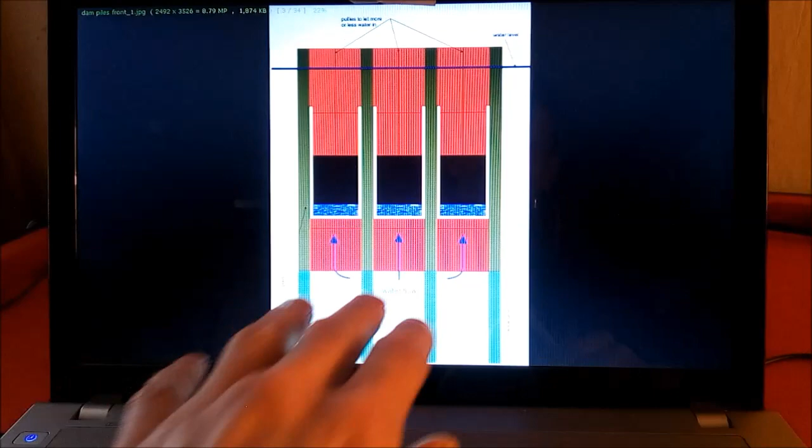Not the greatest quality in the world, but it gives you an idea. On the other drawing I did, these were higher, and this is to let the water in. As you let the water in, that's what powers your turbines.

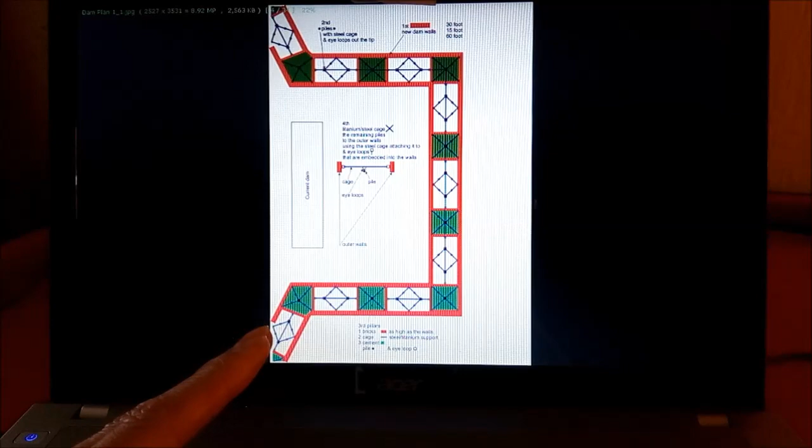With building these structures, you'd have the main river that would usually flow this way underneath the screen. What you'd want to do is manipulate it so it blocks off here, and the water comes running in this way, while you still keep the original river here. Once it's run through here and gone through your dam, you connect it back to the river, so that if there was any integrity issue or something went wrong, all you'd need to do is lower the arm here and allow the river to start flowing in its usual direction. This would act as a holder, and I'm pretty sure the water would take a bit longer to flow back through this way, but it beats the water flowing over the dam.

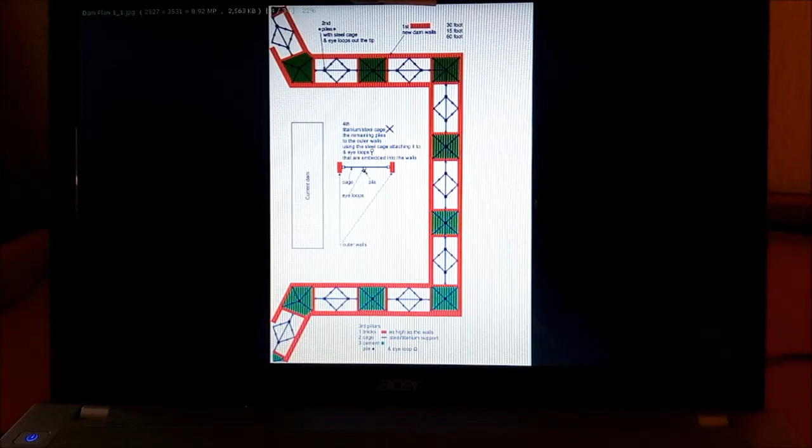So yeah, I chose steel or titanium, and these would be fixed to piles. If you don't know what piles are, Google them - they're quite interesting, how you get it done with a rig and everything else. So that's basically where I went with that.

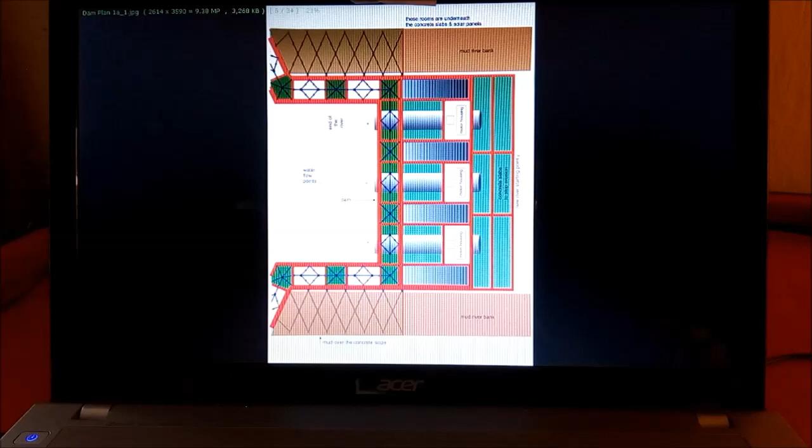This one would just show you the inside of the dam's structure. So we have a bank here. If the original river would be running here, this would be a side of it, and the arm would be over here. That would either stop the water from going in the normal way from the river, so it goes through your dam and through your turbines, or you'd lower this with an electronic arm maybe, and the river would flow on its normal course if anything untoward happened within these motor housings or anything else - if you needed to put some more piles in, or the integrity of the structure didn't work too well. Who knows?

It beats the water flowing over the dam and then causing further problems. This way it can store the water but not have any more pressure put on it, if the original river was able to still flow.

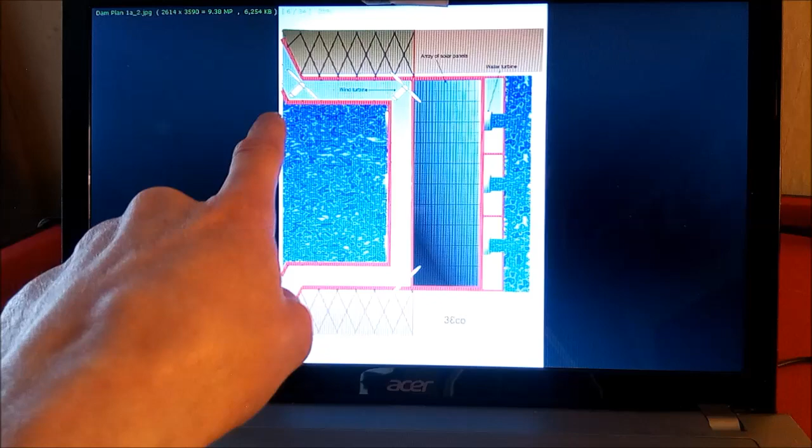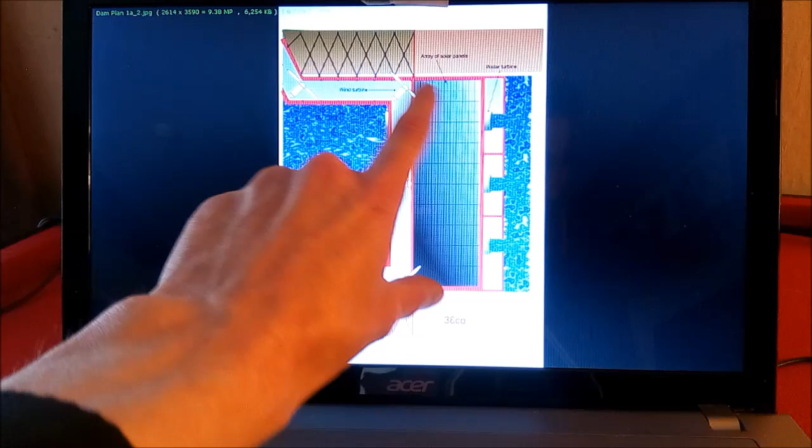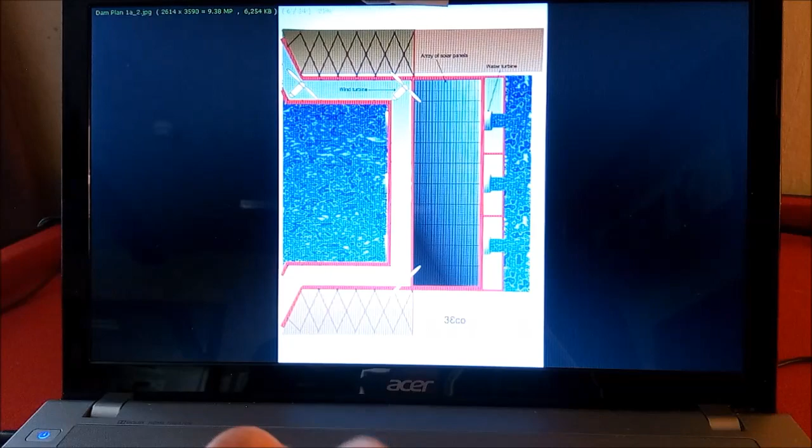So this is the final product of what you would see. Again, wind turbines - I don't know if you can make these out too well, they're on my website so you can check them out there. This is a nice grid of solar panels, obviously slanted, so from the side view these solar panels sit down the slope. Usually I see a lot of these slopes wasted, so I'd also be tempted to put some solar panels here as well and use the space with that slope and this slope down here. I called this one 3Eco, as it's three types of energy: solar panels, wind turbines, and the turbines from the water, generating free eco - three lots of energy all in one hit, to be honest.

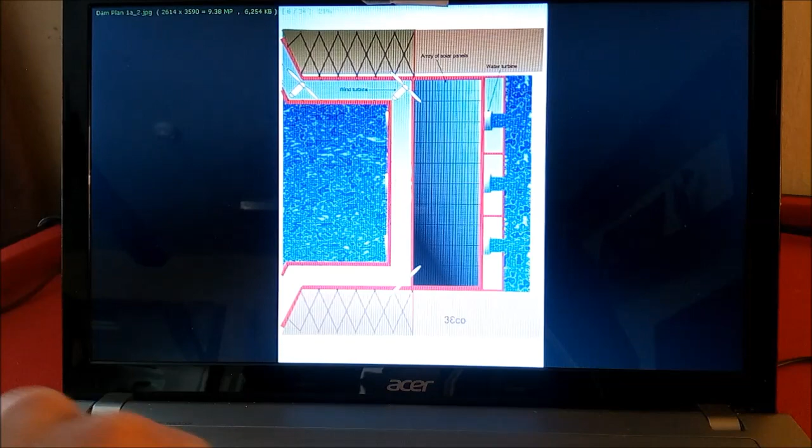So I don't think there are any more - that's something different, that's basically where I got with those. But there is another drawing I've got, still in the pipeline to be fair. I've not completed it yet, but when I do, I'm going to share that one, and it explains how we can do this in steps.

We can make basically one of these, and then further down the river we can make another one, and then further down the river we could make another one. Each one would generate copious amounts of energy, and if you can convert your whole river into a series of dam after dam after dam, the amount of power you could generate is quite a lot.

There's another thing environmental groups would probably come at you and say: what about fish? Because eels most certainly travel upriver, wouldn't this stop them traveling upriver? Now, the dam itself would, but there's this other invention I'm adding to the other one that would allow the fish to sidestep these.

So you know how there are areas where deer, badgers and stuff can go underneath tunnels under main roads and dual carriageways, so they don't go over the top, they go underneath? It's the same principle I've used for this, which would allow fish that swim upriver during their breeding times to use this to sidestep the dam. They wouldn't need to interact with the dam, and would be able to find their way through without affecting it or causing water to flow through that channel. It's just too thin for large volumes of water to get in there.

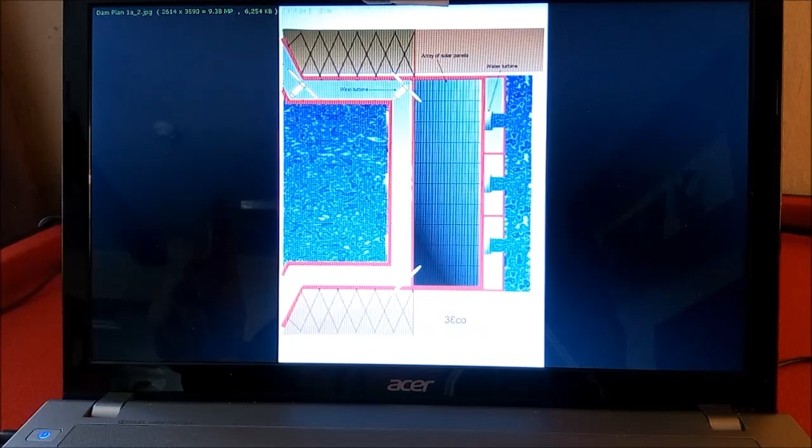I do apologize. So yeah, these dams I think would be pretty good, but generating quite a bit of energy, to be fair. Three types - nice wind turbines sat on top. Obviously when you get fast flowing water, especially through turbines, and it starts rushing out this end, I think there will be an airstream that flies up this way.

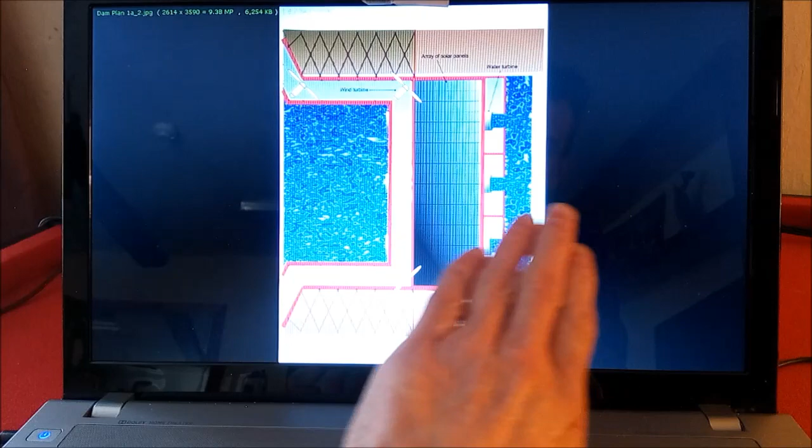Waterfalls, anywhere you've ever been where there's fast flowing water - there's this weir in Thetford, there used to be one here in Wymondham but not so much anymore, I think they've taken it out. But wherever you have fast movement of water, I don't know if you've ever picked up on that.

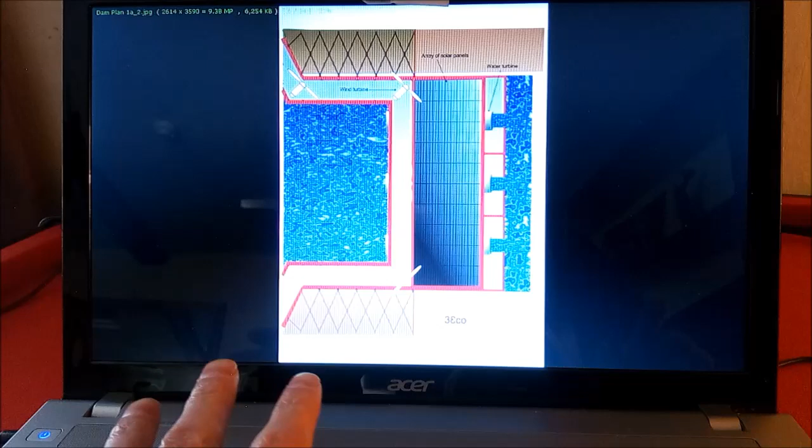You get this breeze, quite a strong breeze coming off any water that moves fast. If you have your power shower on and you stand slightly away from it with the cold water running rather than hot, you can feel a breeze - it almost generates quite a strong breeze. Considering it's just a power shower, the same thing will happen with these, and that's why the wind turbines are sat up here.

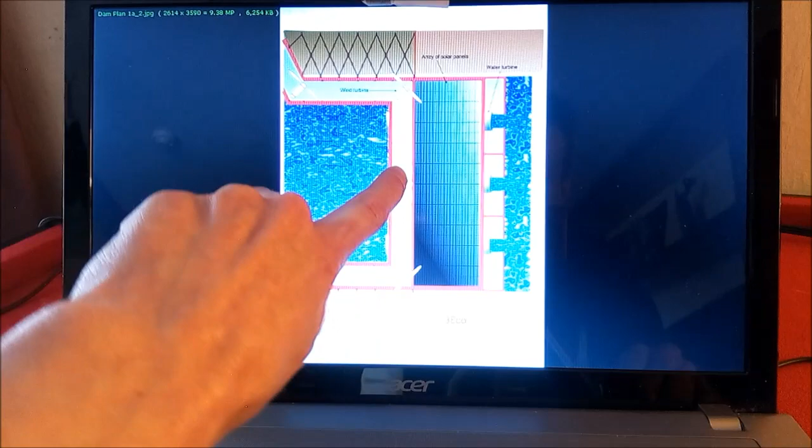There's one in the middle here, although it's not very clear on here, to be fair, not really picking it up. So there's one here, one here, one here, one down here, one here, and there was also one over here and one over here.

And that wind generated off the water moving fast will power the generators on the wind turbines to give even more power, I believe. So even if it's a windy day, the wind will slide up here because it's quite aerodynamic, because like I said, it's on a curve.

I wanted to get this one out of the way because every time you mention dams to people, they aren't very confident with them. They'll always bring up the China dam. There was a dam in France, or maybe Italy, that also had technical issues and integrity problems when they started building it.

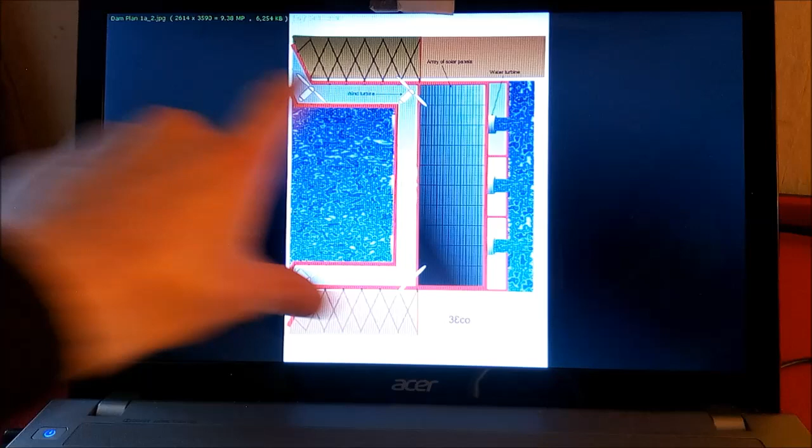Again, we could build these right before the ocean, at the end of the river, and build a lot of them at the end of all rivers, taking it in steps. If there's a lot of water and increased rain, we just keep it beside the old river and manipulate the flow of the water.

Usually the water would flow this way, but if we put an arm here, a mechanical arm that opens and closes, it can fill this bit. If there's a large amount of rain or the integrity is becoming bad, we take the pressure off by opening this gate, and the water runs its normal course, slowly trickling back into the river.

We could control the flow here by shutting it off using these. Drop these down and open the gate here. These would then stop putting out their water, and the river would continue on its normal path like it always used to.

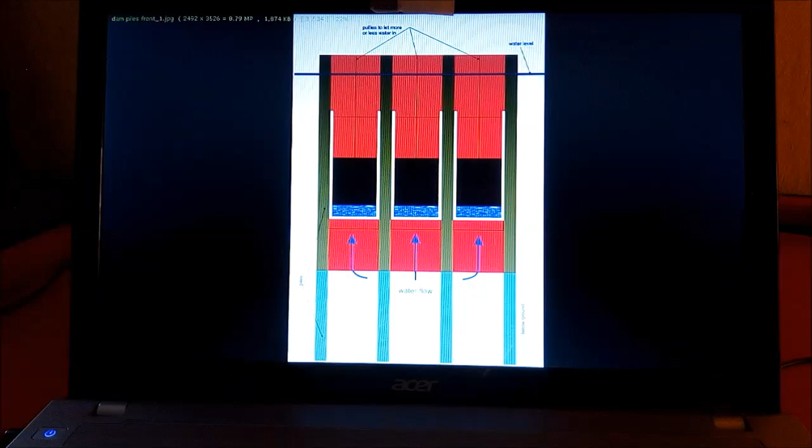The water that's been held back would stay here, and slowly, if we opened these just a small amount, we'd turn on the water, which would come out here and feed onto the river, so we don't flood any neighbouring houses, villages, or cities in its path if it was to burst.

Slowly this level would start to dry up, the river would go on its normal course, and then technical work could be done to fix the problem.

I think most dams are built on the actual river, so when there's a problem, is it a wonder it becomes a big problem? Well yes, because you've built it on the main river — where else is that water going to go? It's got nowhere to go apart from this way, whereas this one has two ways to go.

It can go on its normal course, which we stopped and manipulated. So we have this much of the river that's the old flow, and now we've created this diversion — diverting the water through our turbines and back into the main river. If there were any problems, we could just lower these and the river would continue to flow like before we built the dam.

Rather than having the dam where there was only this one way out and way in — if there was ever a problem, the only thing you could do is wait for it to break, and then a large volume of water would flood everything. This way eliminates that problem.

There's always a way around this type of situation to stop big problems from happening. You have to think about the problems that could happen and implement solutions into your ideas. That way, what you get isn't exactly fail-safe, but it's definitely a lot more contingent.

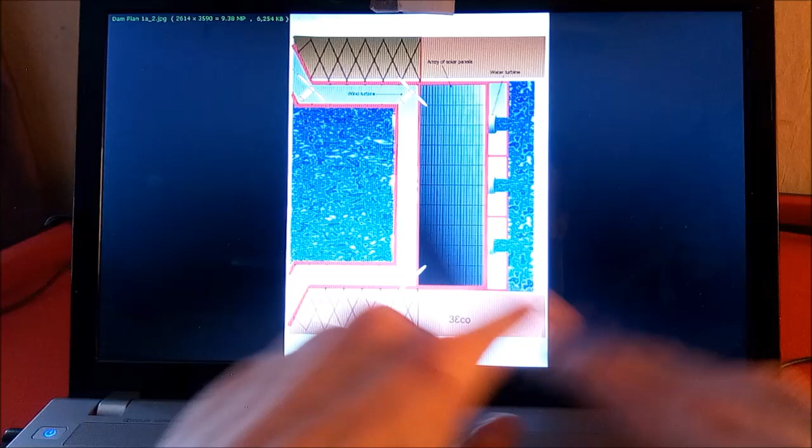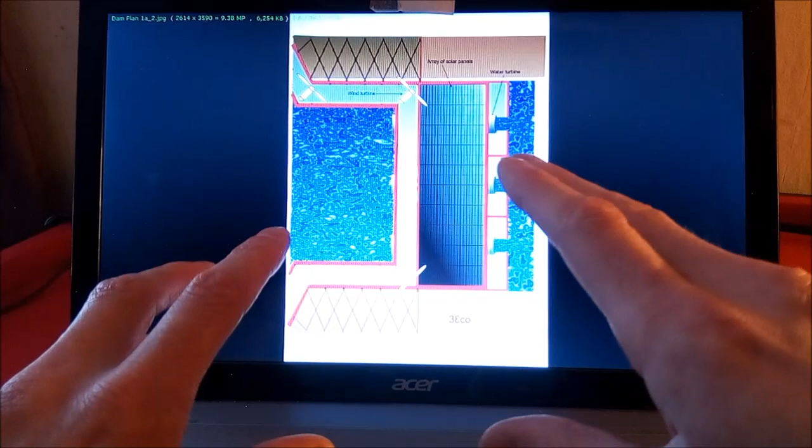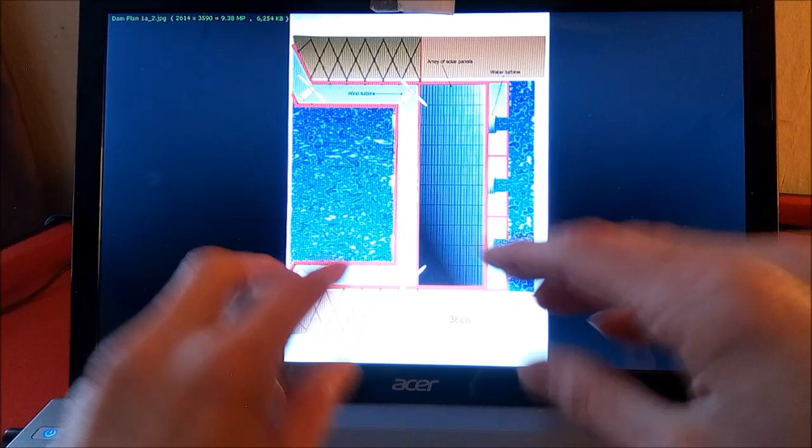Step two is to slowly start draining this into the river so the river will be a slight bit more full than usual, but not all of that water going all at once. We release some of this water back into the river itself. Step three is to monitor it until this dries up. Then step four would be to fix whatever your problems were inside the structure.

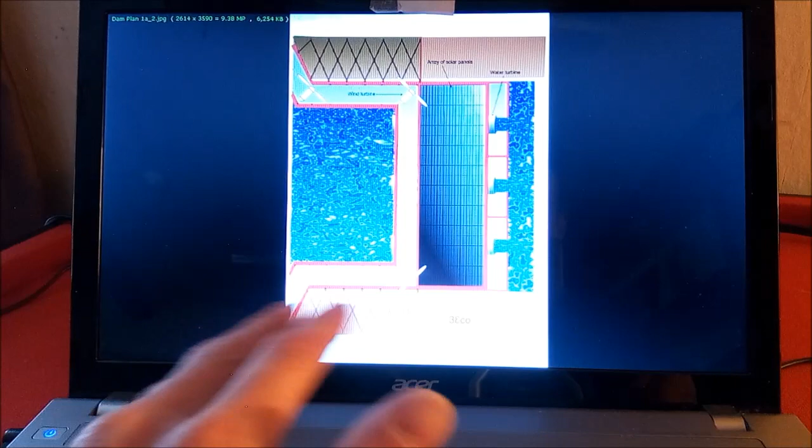Step five is assess and test. Assess the situation - is it going to happen again? It might. How successful was it at letting the water out? Always check your fail safes to see how successful they were. Yes, it worked really well.

Then you have this understanding - not just that you know how to build a dam, but now you understand what to do if this was to ever go wrong. How could we get rid of this water safely without affecting the integrity of the overall dam, or the river's natural flow? I think this is the best way forward, using a lot of forward thinking.

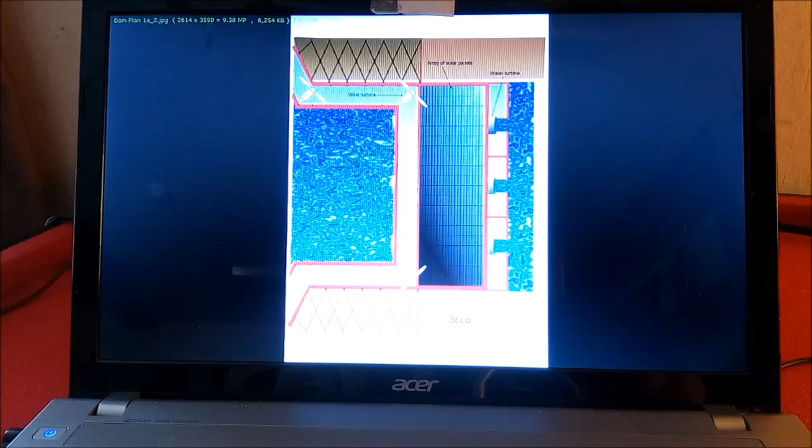We don't ever want there to be a problem with this dam. However, if there was a problem - let's say an earthquake caused a split or a tear through here - we're going to have to deal with that. We can take the pressure off. It's not going to go anywhere. Then we're able to deal with the problems as they come.

Anyway, so as I say, this is just a quick video on that.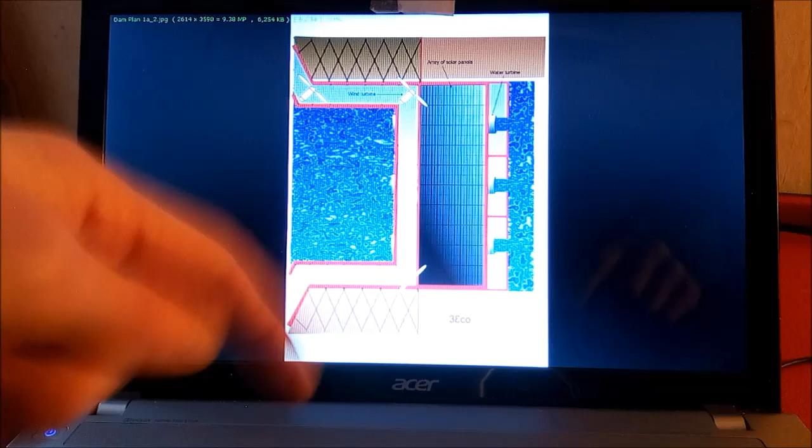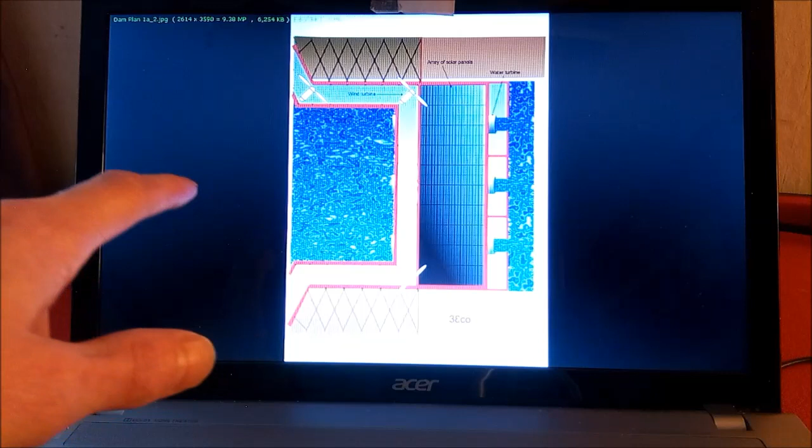Stage one. I have another couple more drawings to go on the next version of this, where they run in steps - basically one dam after another dam after another dam. That one is also on my website, but it was more for a pit. Basically, if we've got pits, we can just recirculate the water.

Keeping water circulating basically stops it from becoming stagnant - keeping water moving quite fast mixes a lot of air into it and stops algae bloom. So it stops things becoming stagnant and that horrible stench you get with stagnated water. Anyway, that will come in another video, but this one's just a quick one.

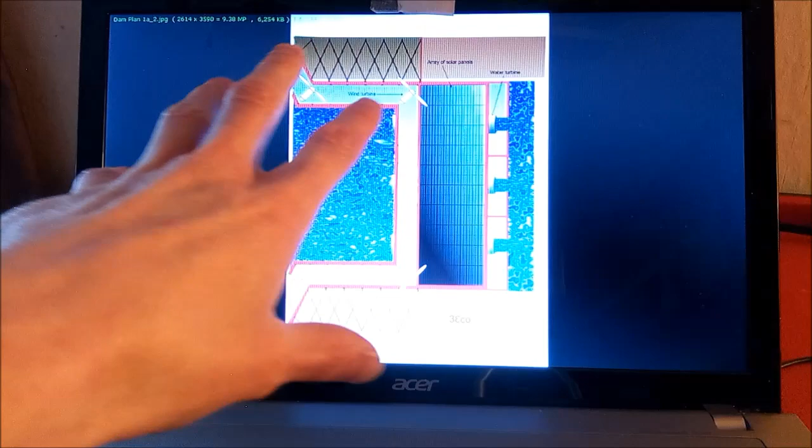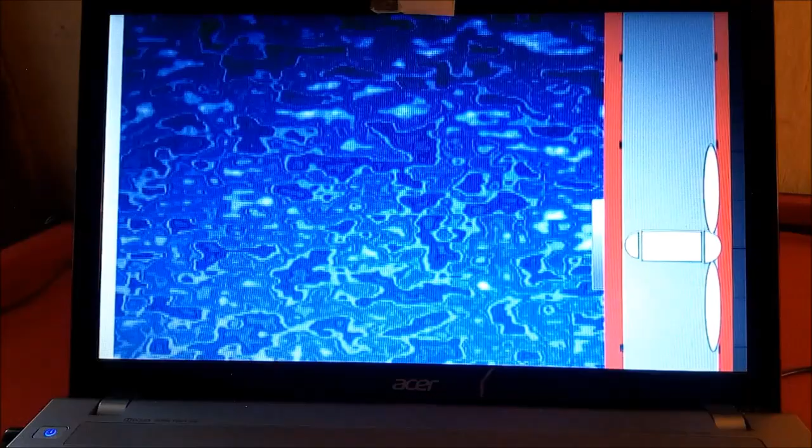Oh, I didn't know you could do that. That's very nice. You can see the turbines on the top there now, a little bit clearer. There's one in the middle there. Nice, another one there. So yeah, those are your solar panels.

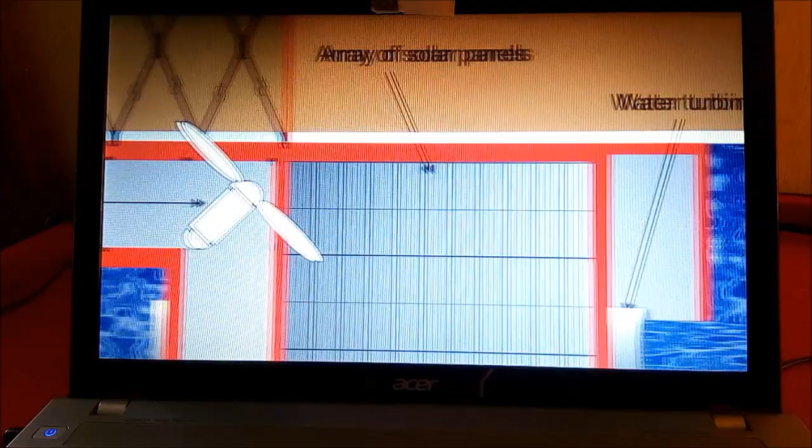Awesome, didn't know that, I'll remember that for next time. It kind of zooms in quite a bit. That's nice. So yeah, basically, that's how it would be.